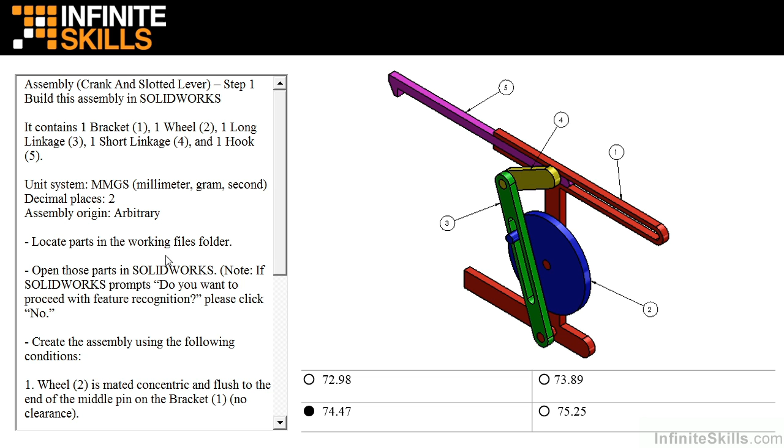And you can see from the directions we're going to be creating this assembly in metric units, and because the answer is a dimensional value, the assembly origin is arbitrary. We are going to locate all 5 part files in the working files folder. And once you locate the 5 parts, go ahead and open each part.

Next, we are ready to begin building the assembly. But before we go into SolidWorks, you know when you create a new assembly, you always need to decide which part to insert first. The first part you insert becomes fixed.

So looking at the directions, it says the wheel is mated to the bracket. The long linkage is mated to the bracket. The short linkage is mated to the long linkage and the hook is mated to the bracket. So it's pretty obvious the bracket is the primary part. So when we create that new assembly, we will insert the bracket as our first part.

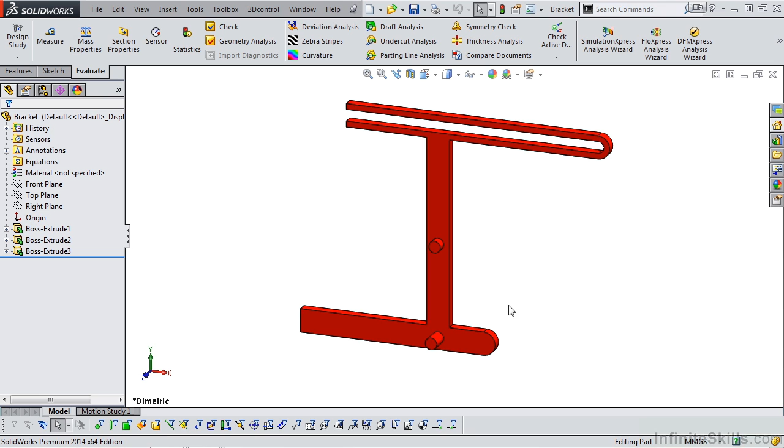Let's go to SolidWorks. On the screen, I have the bracket part file open. I am going to select the File drop-down menu and then select Make Assembly from Part. Because all 5 parts are currently open, they do appear in this window. I'll verify bracket is highlighted and then select the green check mark.

Now before I insert the next part, it's always good to verify you are working in the correct units. So looking at the bottom right hand corner of my screen, I do see I am working in MMGS, so I am good to go. Let's go back to our directions.

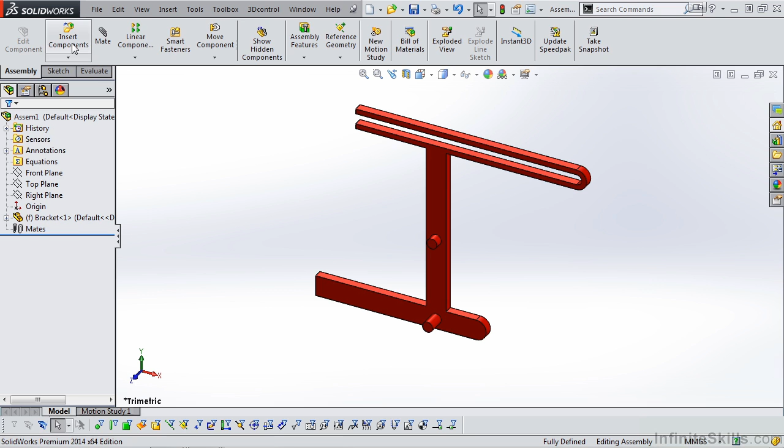Number 1 says the wheel is mated concentric and flush to the end of the middle pin on the bracket. So looking at the view, this red circle here is the middle pin on the bracket. And this wheel is mated concentric and flush to this pin. Let's go back to SolidWorks and insert the wheel component. I'll do that by selecting Insert Components, selecting Wheel, and then placing the wheel near that pin.

I am going to begin by applying the concentric mate. I'll select the Mate button, then select the face of this middle pin and the face of the hole in the wheel. I'll verify concentric is selected and then select the green check mark. Now that concentric mate is applied.

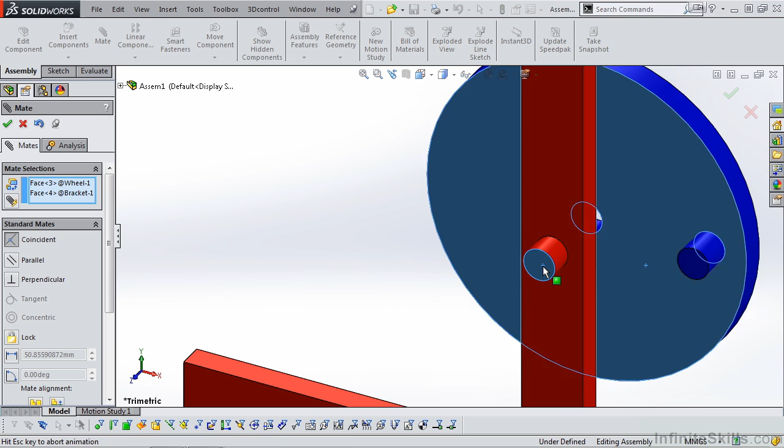Next is the flush mate. I want the front face of this wheel to be flush with the face of the pin. Another name for flush is coincident. So I'm going to select the front face of the wheel, the front face of the pin, verify coincident, and select the green check mark. Let's go ahead and fit this to the screen and go back to our directions.

Number 2 says the long linkage is concentric and flush to the lower pin on the bracket. Looking at the view, the directions are referring to this area. And then it says the long linkage is tangent to the pin on the wheel. Looking at the view, the directions are referring to this pin being tangent to the slotted feature in the long linkage. So let's insert the long linkage component.

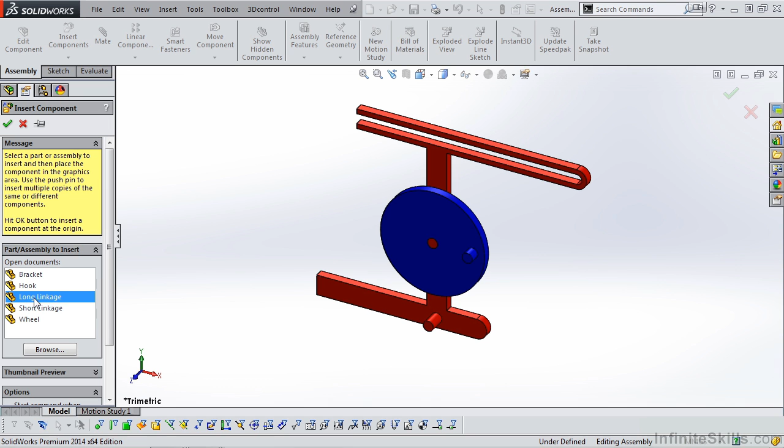We'll close out of Mate, select Insert Components, select Long Linkage, and place that linkage near that lower pin. I'll begin by applying the concentric mate, verify concentric, and then green check mark. Next, I'll apply the coincident mate between this face and the face of the pin, verify coincident, and select green check mark.

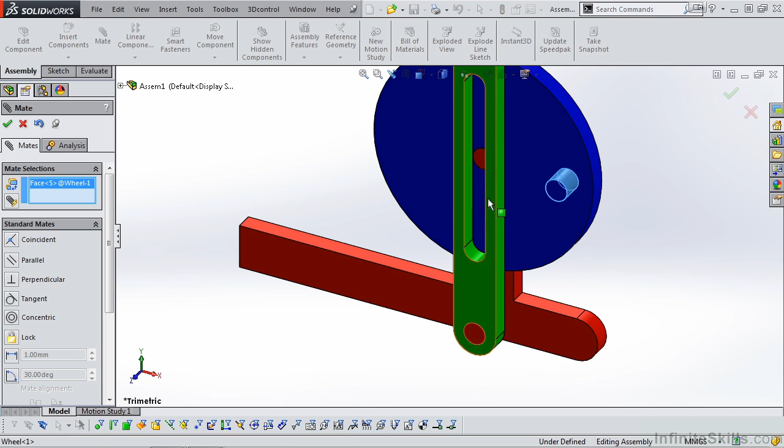The last item here is applying the tangent mate between the face of this pin and one of the long inside faces of the slotted feature in the long linkage. So I'm going to select this face first, followed by this face. I'll verify tangent. Now before I select the green check mark, I do want to show you one item.

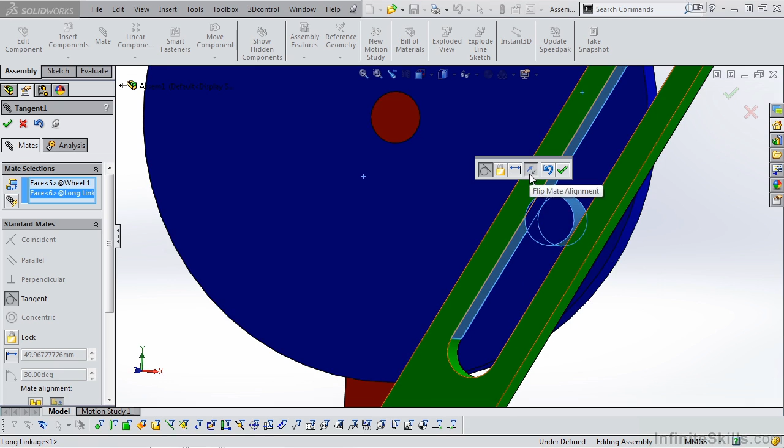Everything looks correct in my assembly. However, if yours appears like this, it's because the tangent mate was applied to the opposite side of what you desired. So all you need to do is select the Flip Mate Alignment button, and it will flip the mate alignment. And once you have the desired results, select the green check mark.

Returning to the directions, number 3 says the short linkage is concentric and flush to the long linkage. Looking at the view, the directions are referring to this area. And then it says the short linkage is concentric and flush to the hook. Since we don't have the hook inserted at this time, we'll apply that mate in a later step.

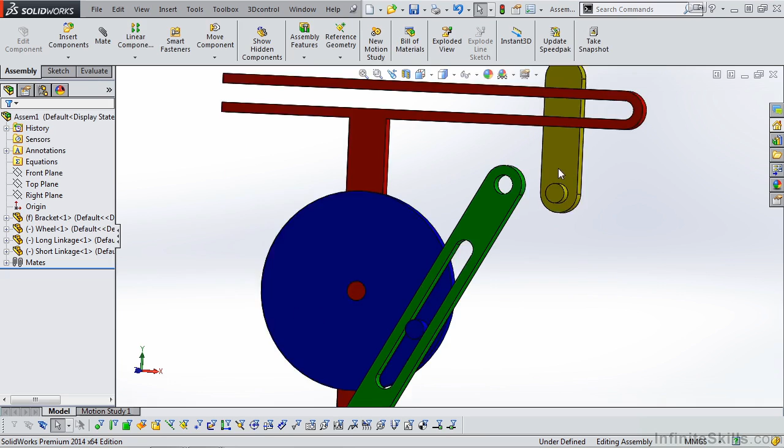Let's go back to SolidWorks, insert the short linkage, and place it near the long linkage. I'll go to Mate, apply the concentric mate, verify concentric, select the green check mark, select the face of the pin on the short linkage, the front face on the long linkage, verify coincident, and green check mark.

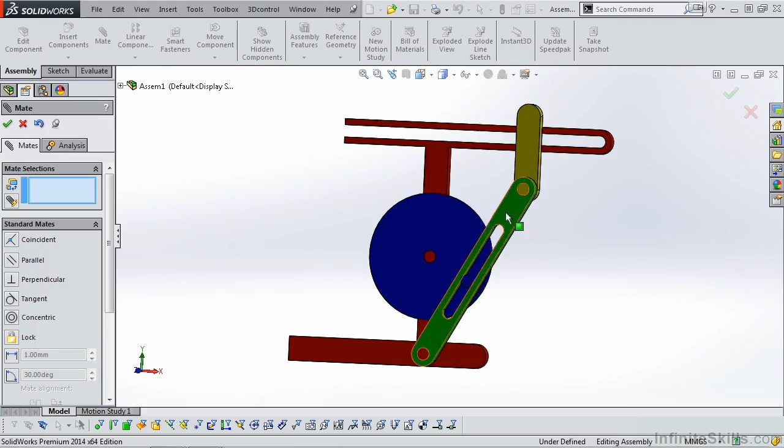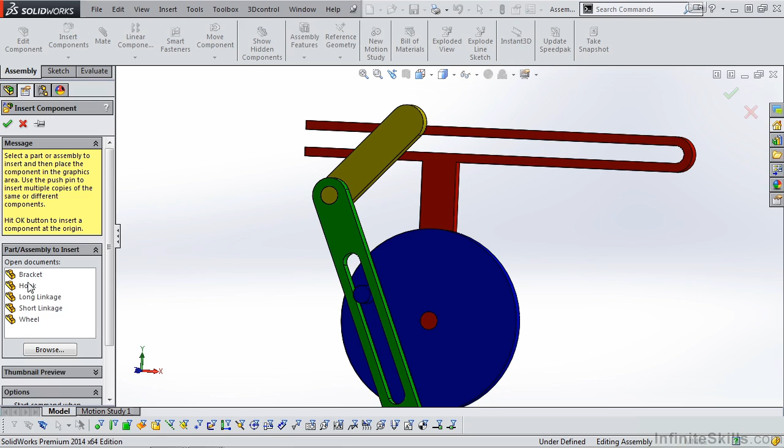Insert the hook component. And let's go ahead and place it above the assembly. We'll rotate this around to the back side. And we'll begin by applying the concentric mate between the 2 round features, verify concentric, and then select the green check mark. Now we're going to apply the coincident mate between the 2 faces.

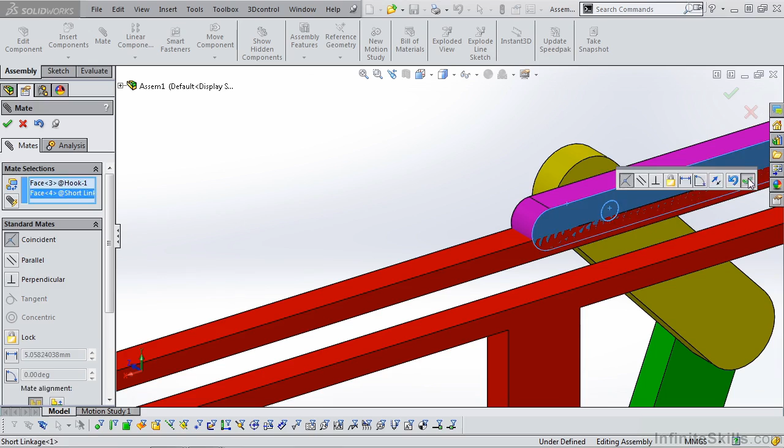So I'll select the face of the hook, the face of the pin on the short linkage, verify coincident, and select the green check mark. Everything's looking good. Looks like we need one more mate to fit this hook inside of the bracket. I am going to simply select the top face of the hook, the mating face on the inside of the bracket, apply a coincident mate, and select the green check mark.

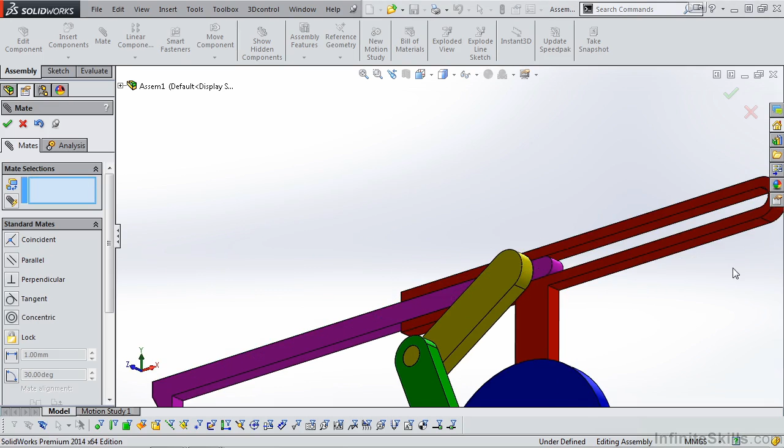Let's go ahead and close out of mates, fit this to the screen. We'll hold down the left mouse button, and we'll move the cursor in a circular pattern, basically rotating the wheel or moving that component. And you can see the assembly does not fall apart. Everything appears to be mated correctly. So we are in good shape with the building of this assembly.